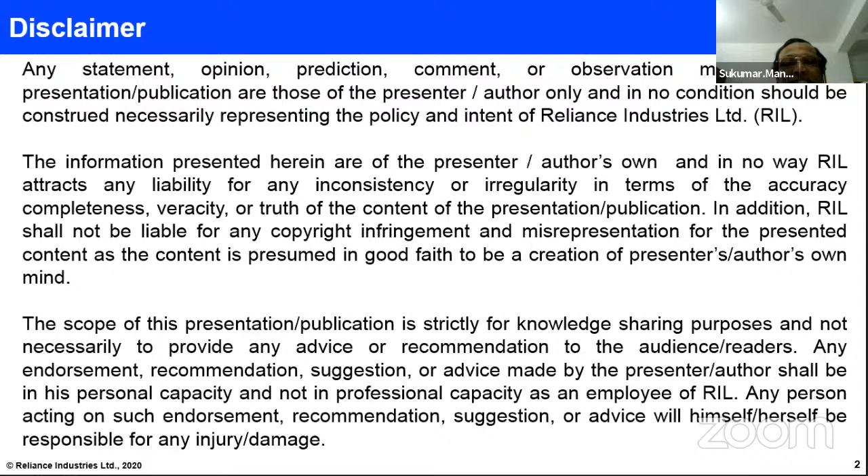This gives some glimpse of our company, Reliance Industries Limited. Reliance, as you know, is really a made in India, made for India, and made by Indians company. It has treated its investors, big or small, as value partners in building world-class assets that have made India proud. Its business is aligned with national goals and priorities for making India self-resilient, strong, and prosperous. The products and services of this company have created immense societal value by touching the lives of 800 million Indians, and potentially all 1.3 billion Indians. Now, at the beginning of a new and unprecedented wave of wealth creation for India by harnessing the power of new technologies to fire its driver's growth engine.

Reliance has three mega growth engines. The first is the new one, Jio, the digital life. Second is Reliance Retail, and the old business is Reliance Oil to Chemicals. In Jio, connecting India digitally with unprecedented reach at affordable prices with superior customer experience - as per the 2021 first quarter data, it's more or less 400 million subscribers in less than 4 years since inception. There's also a lot of growth in Reliance Retail, serving the entire spectrum of Indian society with 640 million footfalls in the financial year, supplying a diversified product portfolio of groceries, fashion, lifestyle, consumer electronics, connectivity through more than 11,000 stores across 28.7 million square feet of retail area.

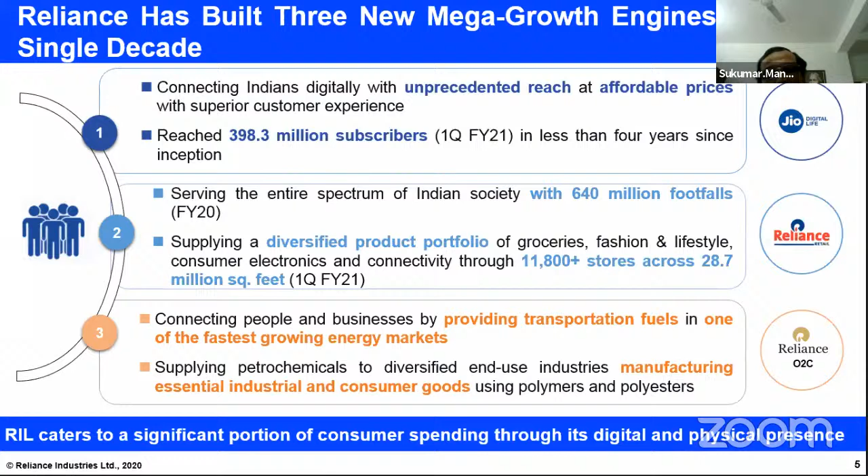Reliance Oil to Chemicals is connecting people and business by providing transportation fuels in one of the fastest growing energy markets, supplying petrochemicals to diversified end-use industries manufacturing essential industrial and consumer goods using polymer and polyester. So Reliance caters to a significant portion of consumer spending through its digital and physical presence.

Now I'm going to my presentation. I'll basically cover 5 topics: value creation from waste refinery streams, how to sustain plastic business without pollution, agro biomass to green hydrogen, waste to wealth - that is RIL RCAT HTL, and net zero CO2.

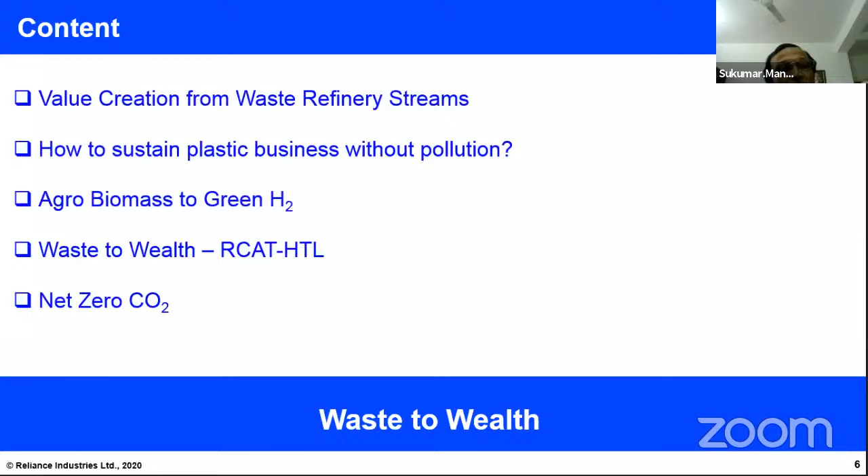So first I'll go with the DSO, that is disulfide oil or sulfur oil. Disulfide oil is a byproduct of the desulfurization process of LPG.

The LPG goes through a process called MEROX, which stands for mercaptan oxidation. The LPG contains lighter mercaptans from C1 to mostly C3, C4, which impart odor, induce corrosion, and cause environmental hazards.

In the MEROX unit, that mercaptan-laden LPG, containing methyl mercaptan, ethyl mercaptan, and so on, is treated with caustic solution in presence of a homogeneous catalyst.

So that reaction works like this: when we get the LPG, it mostly comes from FCC, that is fluid catalytic cracking, or from the coker, delayed coker unit. In addition, we have LPG source called saturated or straight-run LPG, which basically comes from CDU.

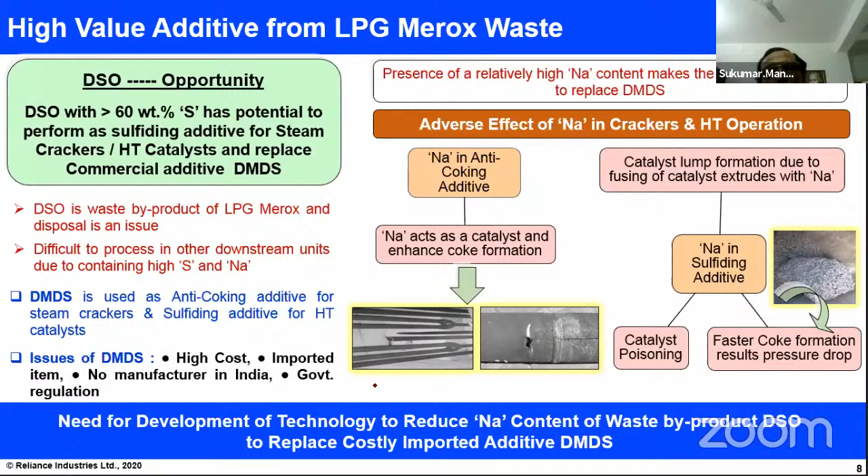So as such, although DSO has a lot of sulfur, I cannot use it as a sulfiding agent unless I have a suitable method to remove the sodium. With this background, it was our motivation to develop a process that can reduce the sodium lower than 1 ppm in the treated DSO.

This gives a little more explanation: when used in a cracker, it increases coke formation, and that leads to reduced heat transfer coefficient, so the furnace side's heat requirement or temperature requirement will be high. The deposited coke hampers heat transfer, increases coil pressure drops, and affects skin temperature of the external tubes. So that's the issue.

So basically the additive DMDS is decomposed at high temperature, and then we get the sulfur. That sulfur poisons the fresh metal on the furnace coils, mostly nickel and iron, passivating them, which is why it reduces coke formation. That's why this sulfur is used.

Again, in the hydrotreating catalyst, the catalyst, actually CoMo or NiMo, is all present in oxide form when you start using it. That oxide form is very less active, so to convert it to the more active sulfide form, sulfiding is required.

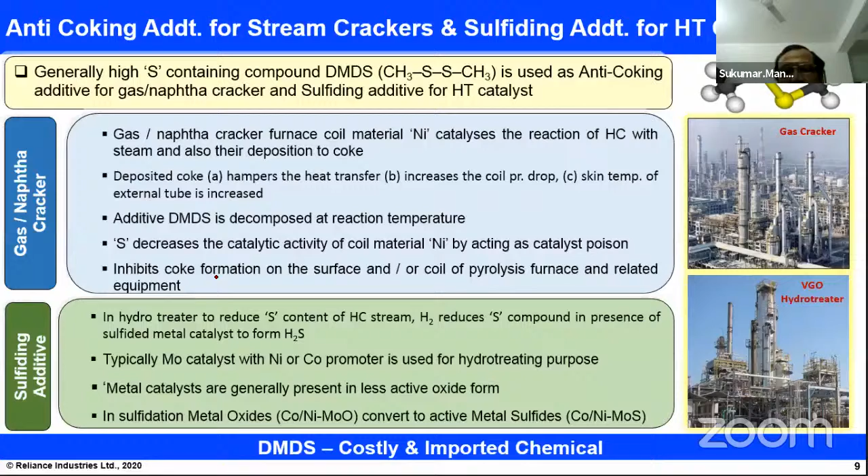So we basically developed a patented process wherein we develop an adsorbent based technology that makes sulfur oil high value, that DSO, by reducing sodium well below 1 ppm while maintaining stringent specs of water and sulfur.

We have patents granted in India, US, Europe, Gulf countries, and Nigeria. So we have the global patent and freedom to practice for this process. This is unique - nobody has developed an adsorbent to remove sodium like this. Our process has significantly low capex and opex, is very simple, highly efficient, and a green process.

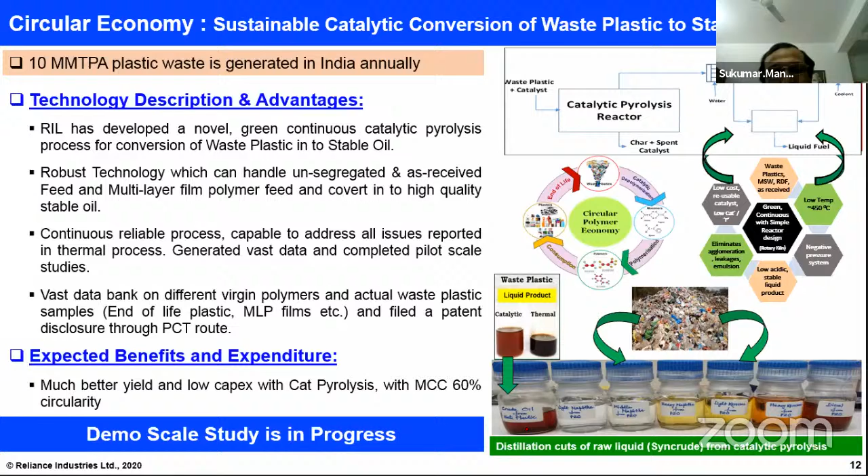In the liquid, you'll get mostly the gasoline cut. You'll get low light cycle oil, and the clarified oil is very less. LCO is minus 20, CSO is minus 10. And again, because of the catalytic effect, your reaction temperature is around 50 to 60 degrees lower.

So the novelty is that it is capable of processing as-received feedstock, MLP, and other different kinds of feedstocks. The novel design reduces vapor residence time and increases the liquid yield. Proprietary catalyst with very low catalyst to feed ratio, and the catalyst can be regenerated. The liquid product's API is 35, low sulfur.

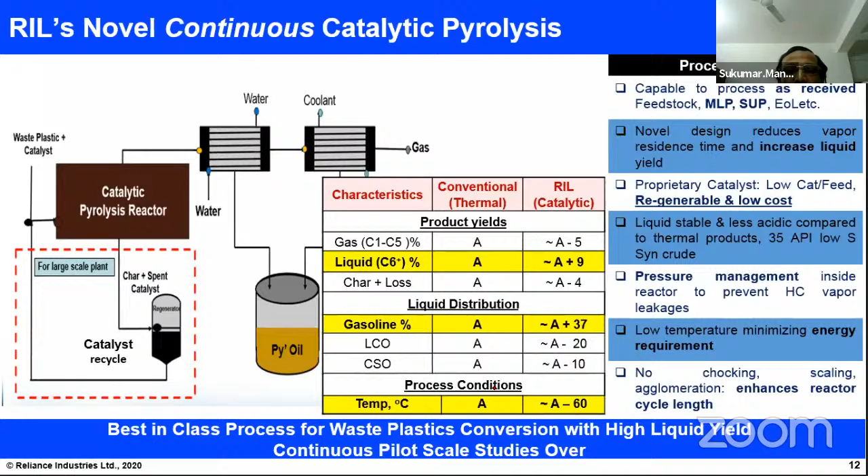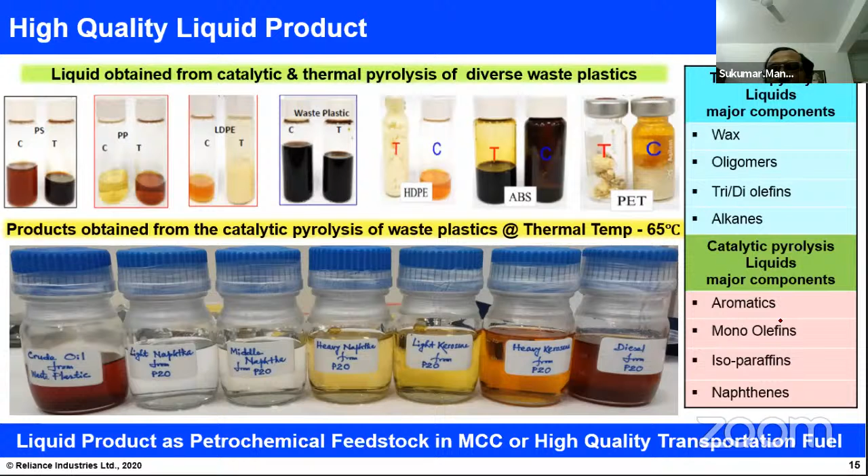In our case, its major components will be aromatics, monoolefins, isoparaffins, and naphthenes. So if we crack it in MCC, then from monoolefins we will be getting lighter olefins, and aromatics end up as BTX, benzene, toluene, xylene. So that was the waste plastic process.

Now this MCC is really our oil to chemical process. In the future, as you know, the prediction is that from 2030 onwards, our transportation fuel demand will be dropping drastically, because it will convert into electric vehicles and all. So what will industry do? Those who have a refinery need to operate the plant in such a way that instead of making transportation fuel, they make something else.

If you see the plots, I have not given details, but the growth of petrochemical feedstocks, basically for making plastics and chemicals, petrochemicals, is very, very high. So if I can operate the plant to make petrochemical feedstocks instead of transportation fuel, then I can sustain the operation, and the profit from petrochemicals even today is higher than making transportation fuel. So our whole oil to chemicals business has a lot of stakes on this process development.

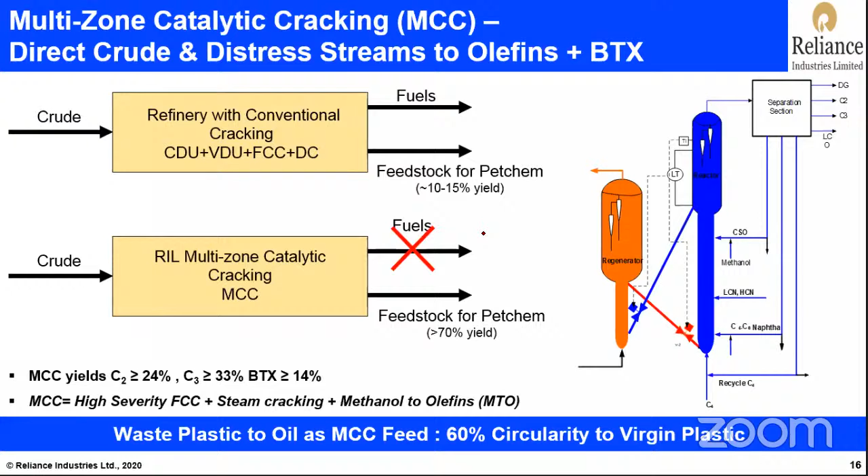Before talking about multi-zone catalytic cracking, I'll take 2-3 minutes to explain how FCC works. Some of you may be aware of it, but I'll give a few details so it will be easy to discuss MCC. In the FCC, the left side is called the regenerator, the bottom zone on the right side is called the riser, the top is called the reactor, and the bottom portion of the top zone is called the stripper.

The fluid bed catalyst, which is microspheres, comes from the regenerator, which operates at a temperature of 700. The regenerated catalyst comes through this line and ends at the bottom of the riser, and here the catalyst contacts the feed, and immediately the feed gets vaporized and starts cracking. As the temperature here is 700, the feed vaporizes in a very short time. Feed is injected through a nozzle.

It gives a mist kind of material, and it is vaporized. And after vaporization, the cracking starts in the vapor phase, and it is converted to the product as it goes on and on. The reaction starts, and at the end of the riser it goes to the cyclone. In the meantime, when the catalyst reaches the top, the catalyst is partly deactivated because of the coking, and the product and catalyst mixture gets separated in the separating device called cyclones.

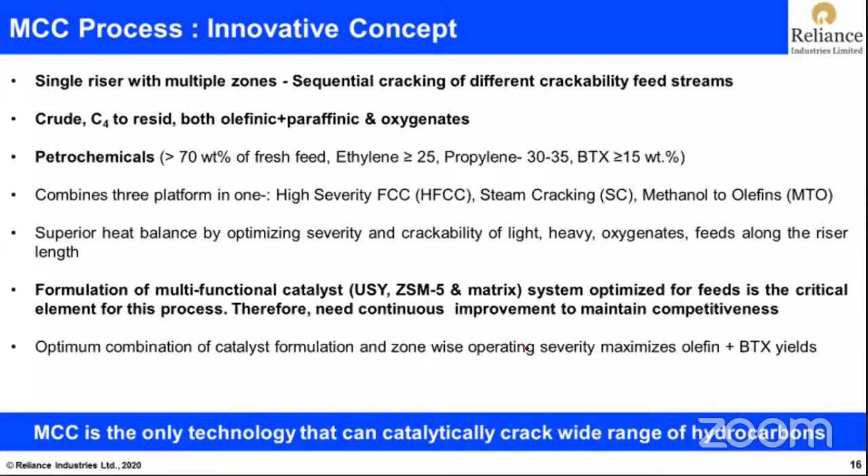So next is agro biomass to green hydrogen. Another very important development is catalytic gasification of agro biomass to green hydrogen. As you know, at Reliance we have the world's largest thermal gasifier for petcoke gasification. So we have developed a dual bed catalytic gasifier to convert any carbonaceous feedstock to syngas. Here I am specifically discussing agro residue. It can even be used for petcoke and others.

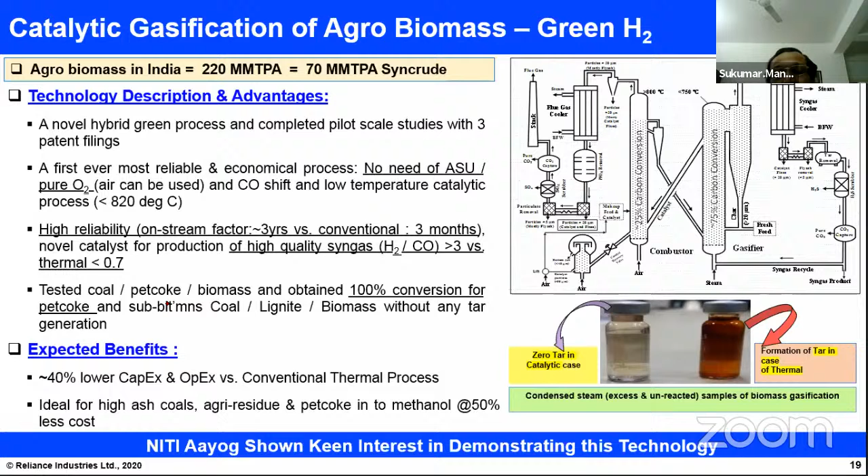This picture shows zero tar in the case of catalytic gasification, whereas the right side is thermal. As for the expected benefits, because of the high reliability and much less complicated hardware, the capex is estimated to be around 40% lower, and the opex also, compared to conventional thermal processes. It is an ideal process for high ash Indian coal, agri residue, and pet coke to methanol. This was also presented to Niti Aayog, and they have shown keen interest in demonstrating this technology.

So now the next topic is RCAT HTL, the Reliance catalytic hydrothermal liquefaction process. We basically started this process with algae to oil, and now it is proven in the pilot plant, a roughly 10 barrel per day pilot plant, for agro waste, food waste, MSW, organic feedstock, sludge, and industrial waste. This shows the schematic here.

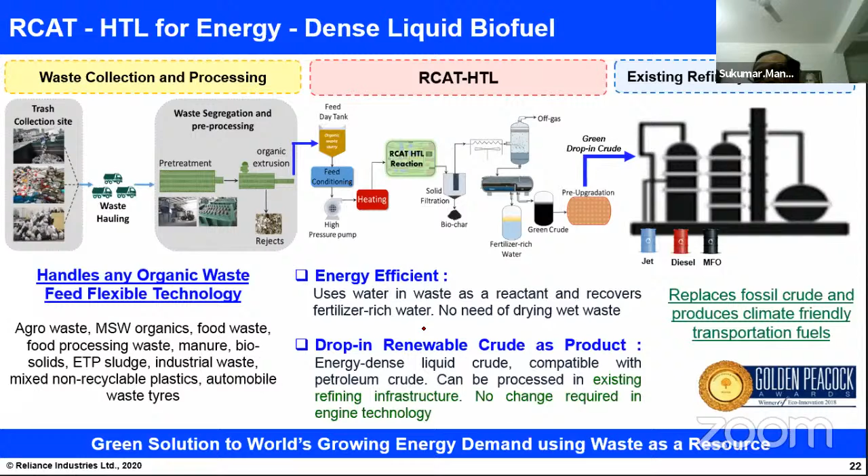So for this process we have 35 plus patents, and presently we have demonstrated at pilot scale a 10 barrel total feed capacity, and we are planning to develop a 50 barrels per day capacity demo plant, and we are trying to see how quickly it can be commercialized, the process.

So that gives the concept to commissioning experience as an end-to-end solution for any entrepreneurs, which can even be licensed. We tested varieties of feedstocks, but the feedstocks having huge contents of moisture will be best suited, because you will be saving money or energy for drying the feedstock. So wet feedstocks will be easily converted in this process.

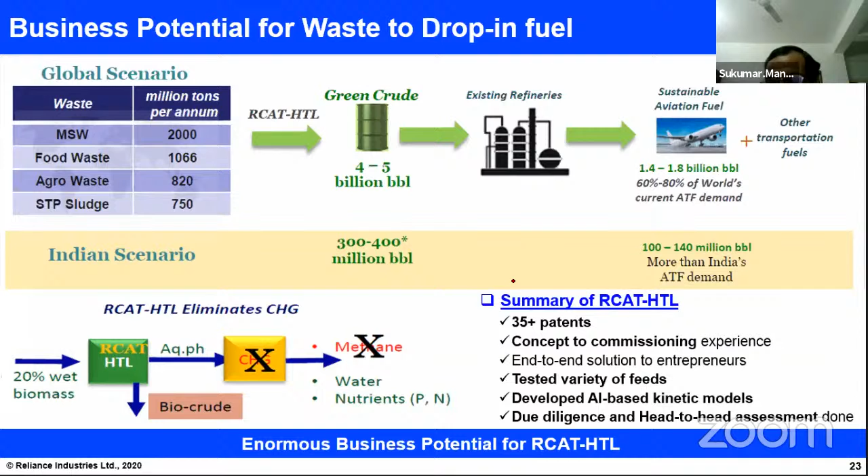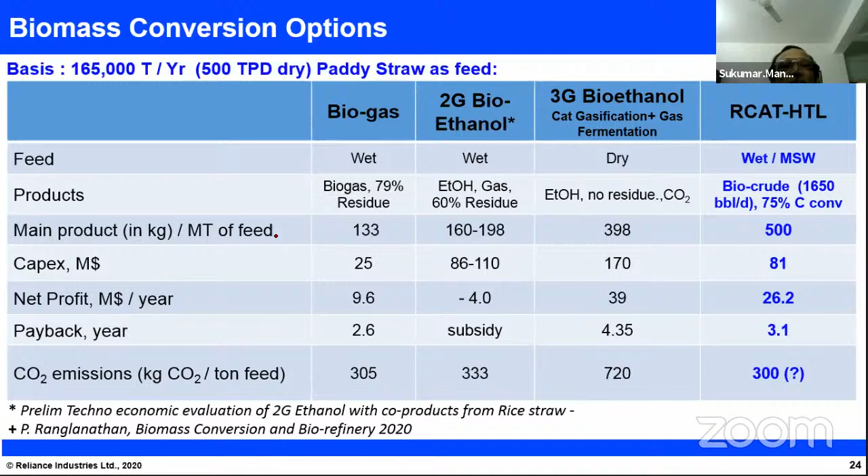And the CO2 emissions, kg CO2 emission per ton of feed processed, is also very low. So that gives a comparison for 500 ton per day dry basis paddy straw as a feedstock. Our company has already declared that by 2030, our process will be net zero CO2.

We are developing dimethyl carbonate, DMC, or it can be used in concrete curing, or basalt rock mineralization, underground sequestration. So these are all getting evaluated, and the economics are being analyzed to implement this process.

Then there are several options like algae to oil. We have a very big program on that - basically CO2 capture to biofuels and renewable CO2 plus renewable power to fuel, waste plastic to oil, bioethanol, used tire to oil, waste cooking oil to oil, biomass to ethanol and green hydrogen.

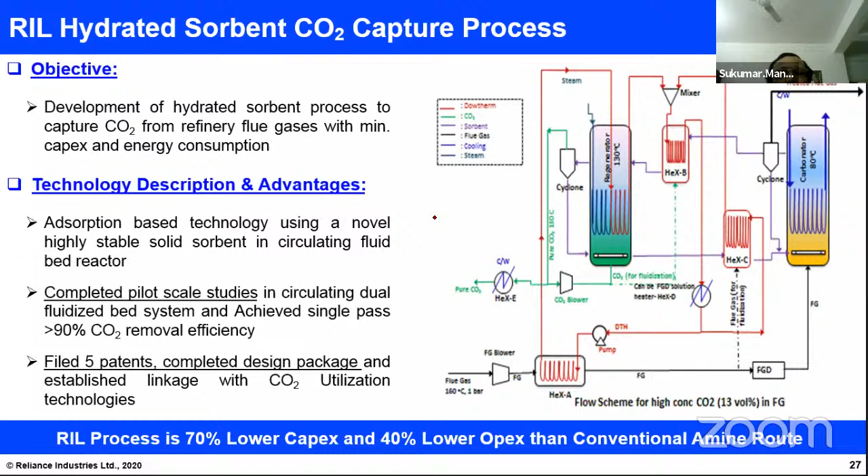With that, I cover all of my presentation. Thank you very much for listening. And if you have any questions or queries, please let me know.

Thank you, Sukumar, for such innovative ideas. The ideas have been translated to technology for the development of our country, what the Prime Minister calls Atmanirbhar Bharat. We are very grateful, because initially it is planned - I mean, the chemical engineers' concept of doing such fuel things from pyrolysis and such. But that is very old technology, and these are all modern technologies. I was in a meeting, but I simply switched on the YouTube channel where I could view your whole presentation. So many avenues you have discussed - really, this is wonderful. I don't know whether our young budding engineers could get this opportunity to translate ideas into action like what you people are doing. So we are very grateful to you.

Our next speaker, Dr. Sourja Ghosh, has already joined. I could speak a lot of things about you because we have a long years' association with this Reliance group, Dr. Arshit Das and others. But let me not speak all such things now and discuss, because our next speaker has joined.

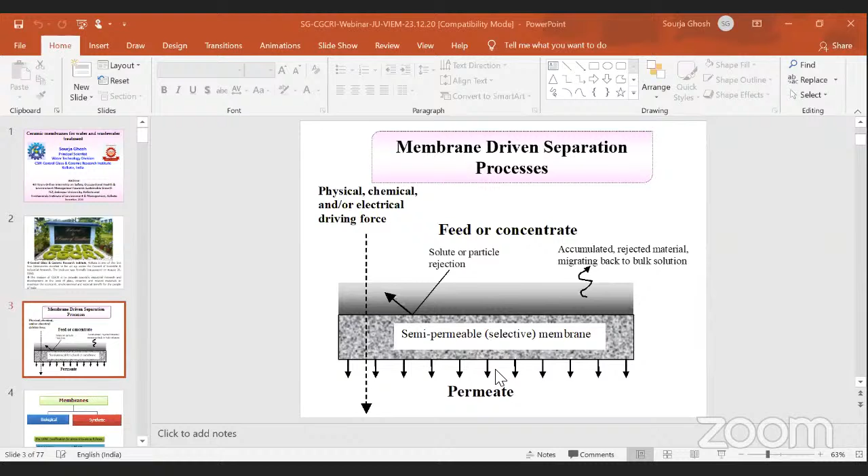So today's topic is on ceramic membranes for water and wastewater treatment. I'll give you a brief idea of membrane-driven separation processes. So what is a membrane? It acts as a selective barrier, and we place a feed to pass through the membrane. It has selective pore sizes, that is the semi-permeable membrane. Based on the pore size, or other driving forces, separation takes place, and accordingly the feed gets concentrated, and we produce the permeate or the treated water.

Now, the classification of membrane processes based on driving forces: microfiltration is a pressure-driven membrane process, and the operating pressure is generally low, that is 10 to 40 psi, whereas ultrafiltration is a bit higher, with pressure of 10 to 100 psi, where it separates biological colloids and macromolecules, covering a wide range of separation. Then comes nanofiltration, which requires around 100 to 500 psi, and the pore size of such membranes is less than 2 nanometers. So we use this for separation of dissolved contaminants and organic molecules.

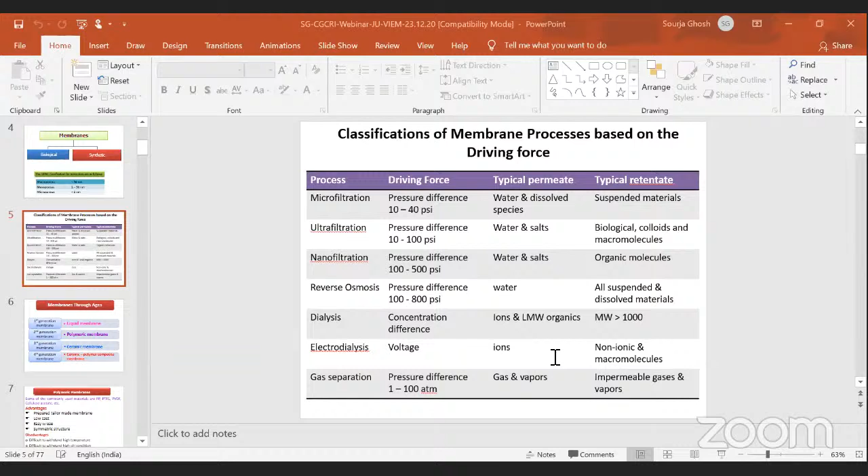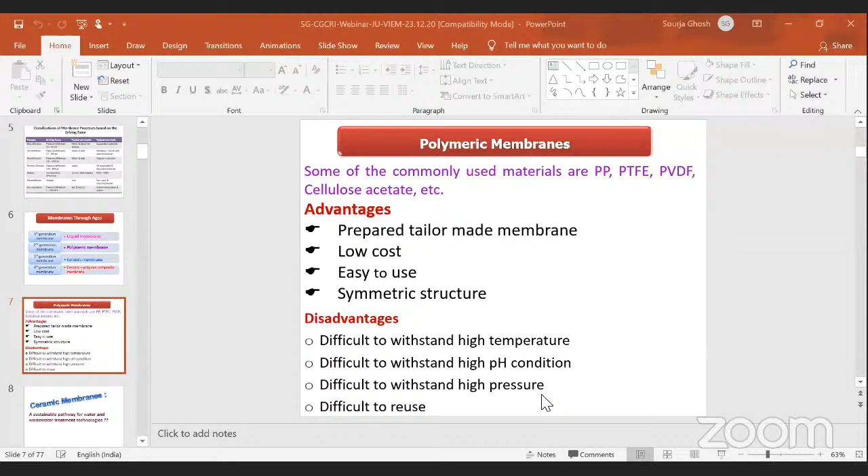For polymeric membranes, the commonly used polymer materials are PP, polytetrafluoroethylene, polyvinylidene difluoride, cellulose acetate, etc. The advantages of these membranes are they are easy to prepare, can be given tailor-made pore sizes, are low cost, and provide symmetric structure. However, such membranes carry some disadvantages also, that is low stability in chemical and mechanical environments. These membranes are also prone to attack under harsh chemical conditions, cannot withstand high temperature, and it is difficult to reuse such membranes, so they have a shorter life compared to inorganic counterparts.

So ceramic membranes come into the picture here, providing a pathway of sustainable nature for water and wastewater treatment technologies.

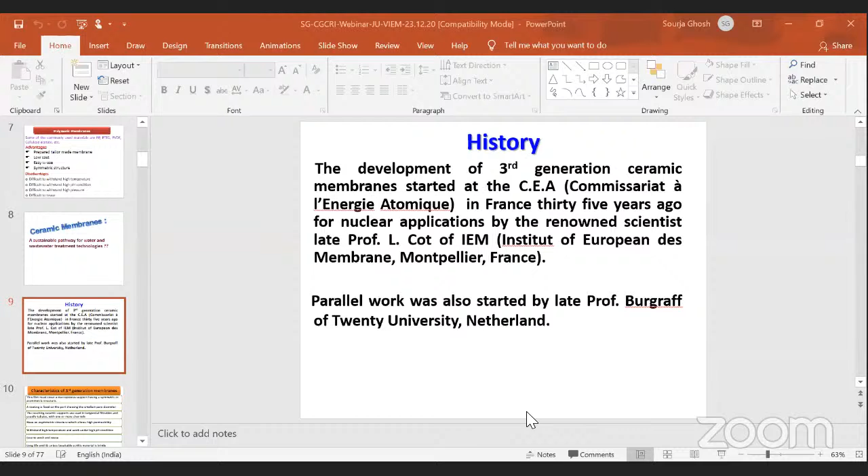So if we go to the history of ceramic membrane, the development of this third generation ceramic membrane was in France 35 years ago. Since then, various countries are engaged in ceramic membrane research, among them France, Germany and the Netherlands. In India, CSIR CGCRI is one of the pioneer labs which prepares indigenous ceramic membranes for various selective applications.

The characteristic of these ceramic membranes is that there is a thin film which covers a macroporous support. The basic nature of the membrane is symmetric or asymmetric. However, mostly it is an asymmetric structure, wherein the coating is given to produce the smaller pore diameter. The membranes are available mainly in tubular configuration, but now also in capillary as well as hollow fiber configurations, and they allow tangential filtration. The membranes provide high permeability, and most significantly they have the resistance to withstand high temperature and work under high pH conditions.

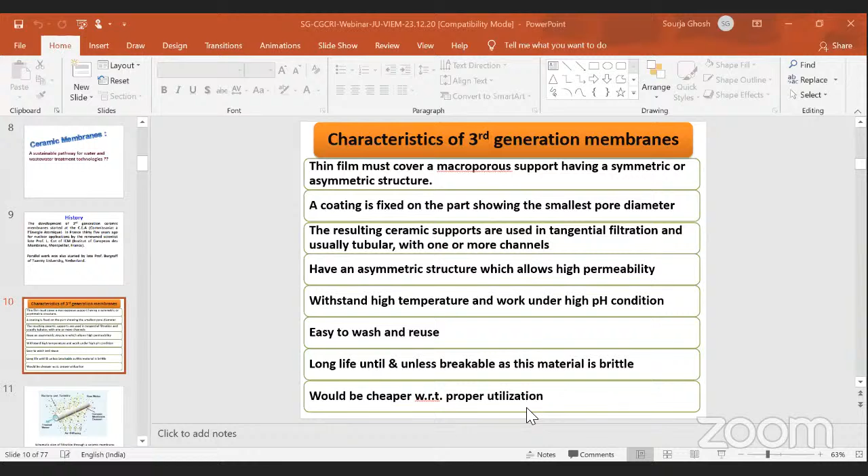Such membranes are easy to wash and can be thoroughly cleaned for reuse. They have a long life compared to their polymeric counterparts, but the problem is they are brittle. Otherwise, these membranes show greater longevity during industrial operations. These membranes can be cheaper if properly utilized. That is, the initial cost of such membranes is high. However, if they are used properly, they will give a longer life and the operating cost will be lower.

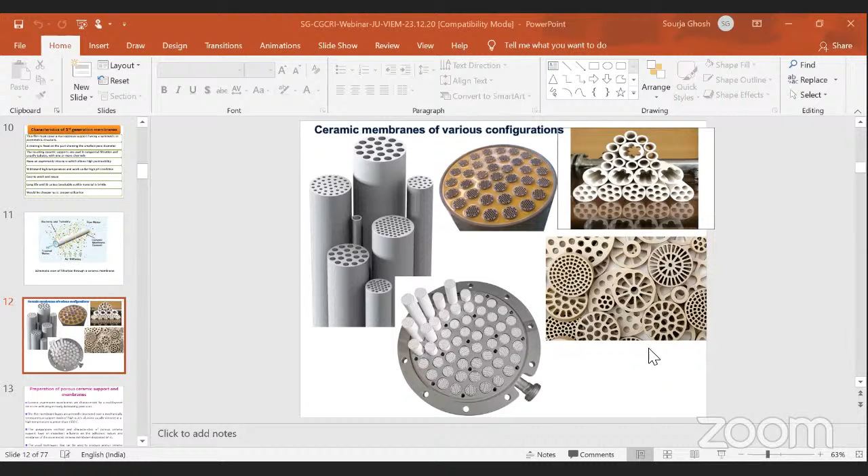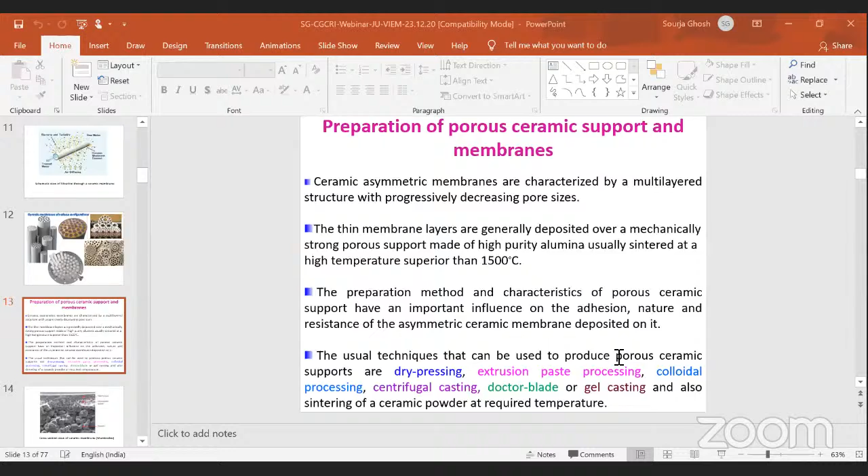The preparation of porous ceramic supports and membranes is carried out in CGCRI. These asymmetric membranes are characterized by a multi-layered structure with progressively decreasing pore sizes. The thin membrane layers are generally deposited over a mechanically strong porous support, generally made of alumina or a clay and alumina mixture fired at high temperature, greater than 1500 degrees centigrade. Over the porous support, a selective layer is given for separation of smaller particles. The usual techniques for preparing this support are dry pressing, extrusion, paste processing, colloidal processing, centrifugal casting, doctor blade or gel casting, etc.

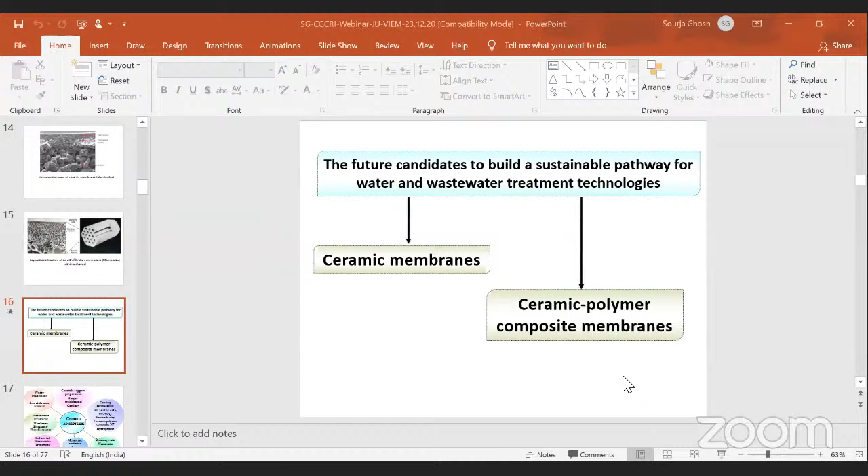So the future candidates to build a sustainable pathway for water and wastewater treatment technologies are ceramic membranes and their counterpart, the ceramic polymer composite membrane, for a wide variety of water and wastewater treatment applications. Now in CGCRI, the ceramic membrane is the heart of the water technology division, and there are different areas. One is support preparation, done in single and multi-channel capillary configuration. Then we apply coatings on such membranes, that is microfiltration, ultrafiltration and nanofiltration coatings.

We produce hydrophobic ceramic membranes. All these are made from alumina, zirconia, titania. The applications involve drinking water, wastewater, brackish water, and grey water treatment. Then we develop a membrane contactor process for CO2 capture using reactive absorbents. Drinking water treatment using ceramic membrane for iron and arsenic removal. Then we apply wastewater treatment using membrane bioreactor technology and membrane photobioreactor processes. Also, we work on various types of industrial wastewater treatment, that is textile, tannery, pharmaceutical, electroplating, and many others.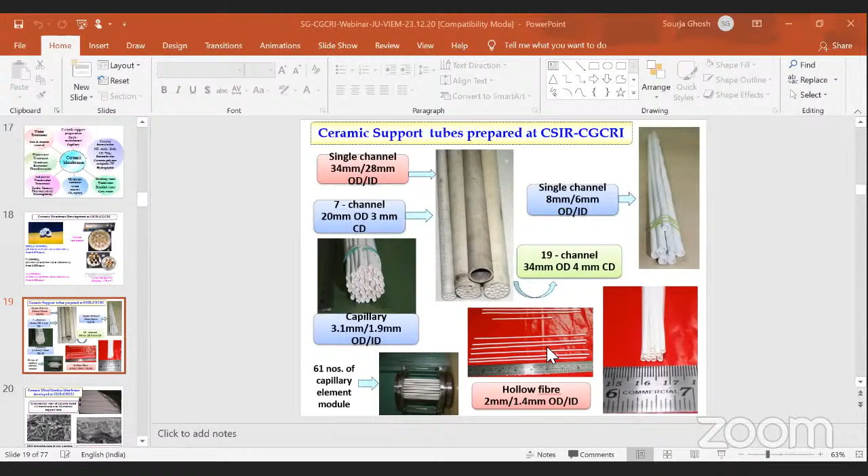These are various types of membranes prepared in different configurations. The diameter of the supports is reduced to obtain high surface area for selective applications, that is called capillary membrane. And these are the very thin hollow fiber membranes, that is 2 mm by 1.4 mm OD/ID.

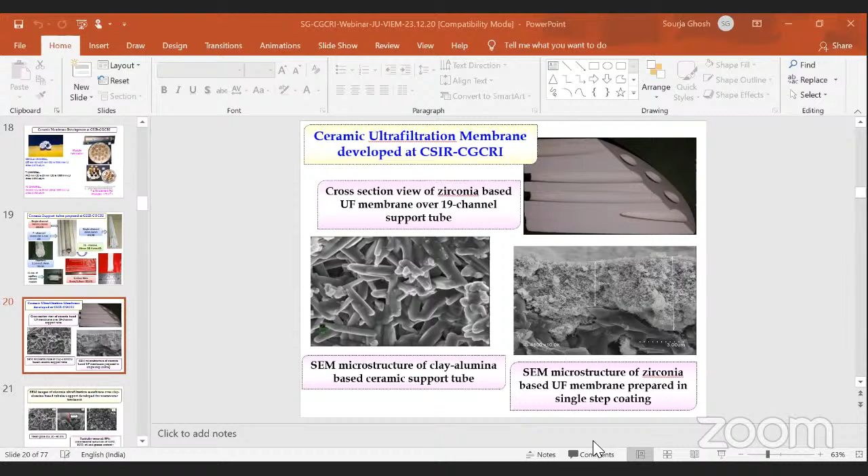This is the microstructure of the ceramic ultrafiltration membrane based on zirconia. This is prepared on a 19 channel support tube, and this shows the microstructure of the membranes, and a uniform coating is developed on the porous support.

This is again another microfiltration ultrafiltration membrane, zirconia over clay and alumina support tube. This membrane showed a pore size of 30 to 40 nanometer, and when applied for treatment of wastewater, it resulted in turbidity removal of 99%. Then considerable reduction of COD, BOD, oil and grease was achieved with complete removal of total suspended solids and MPN, that is the most probable number representing the microorganism concentration in the water.

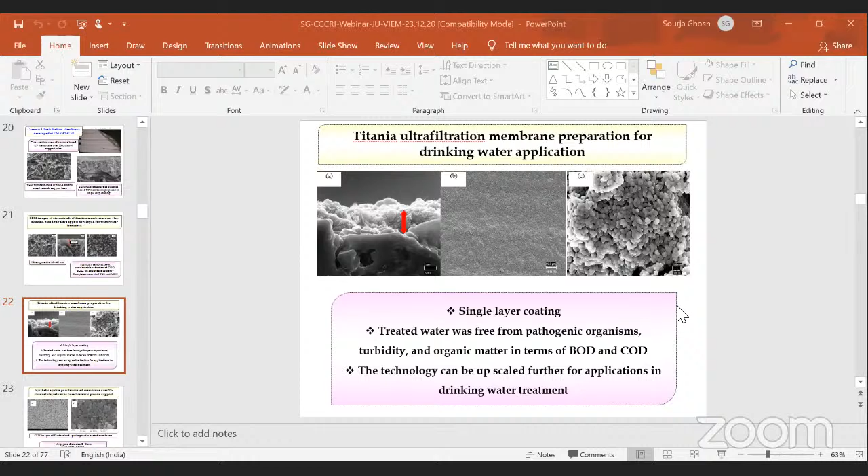This is the titania ultrafiltration membrane prepared for very specific drinking water application. And this is a single layer coating. The membrane is able to make the water completely free from pathogenic organisms, turbidity, organic matter, and BOD/COD. So there is a study going on to scale up this technology for drinking water treatment in very contaminated locations.

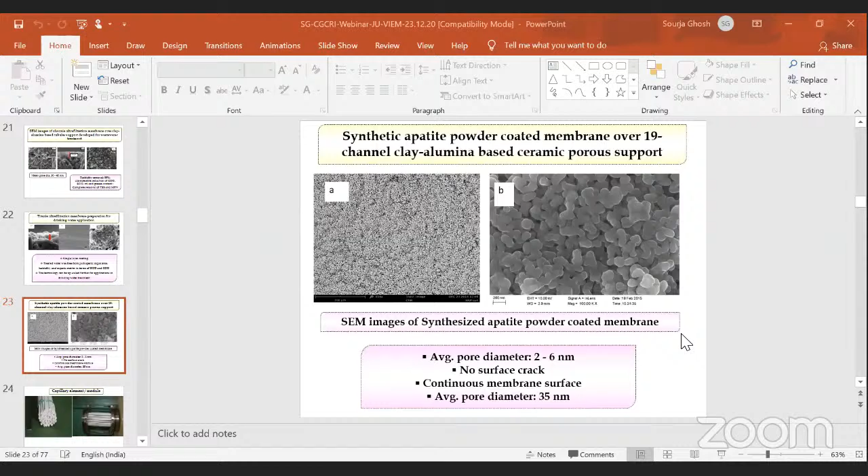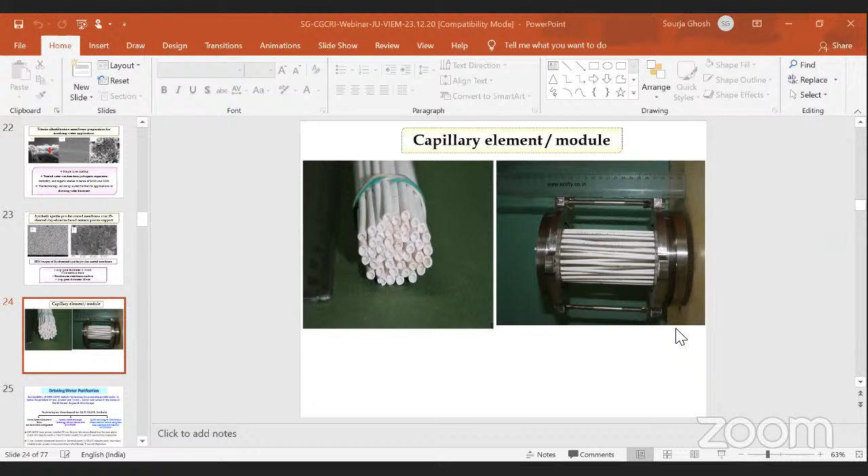This is the capillary membrane element module. This is used for carbon dioxide capture, that is gas liquid contacting operations, wherein a large surface area is required and separation occurs across the surface of the membrane.

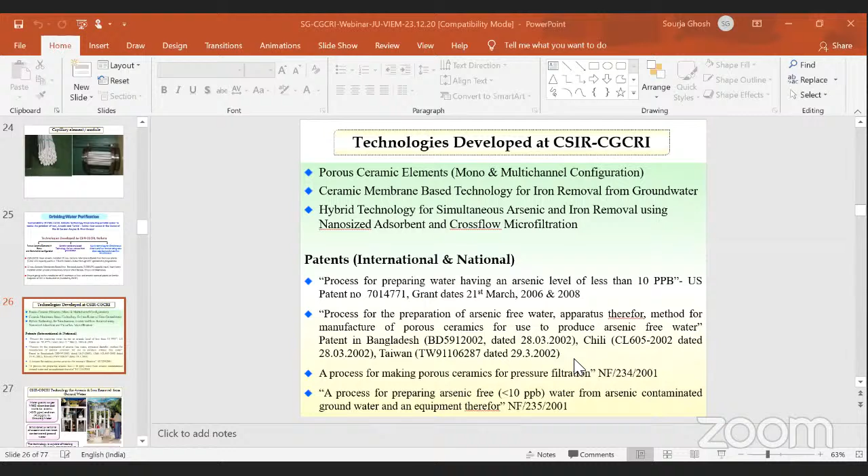Technologies developed at CGCRI. The porous ceramic element preparation technology is developed in mono and multi-channel configuration. Ceramic membrane-based technology for iron removal from groundwater, and hybrid technology for simultaneous arsenic and iron removal using nano-sized adsorbent and cross-flow microfiltration. There have been a number of patents applied, international and national, and the patents are granted.

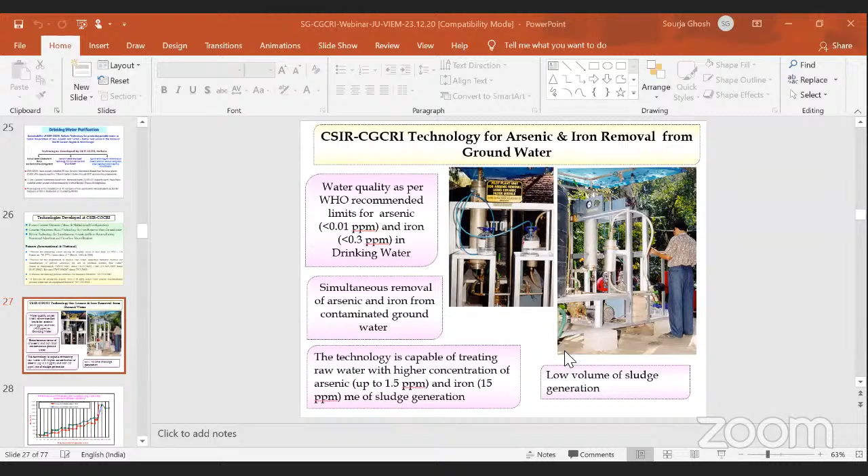This shows the community plant installed for contaminated arsenic and iron containing groundwater treatment. Water quality as per the WHO recommended limit for arsenic was achieved, and also for iron. The technology operates for simultaneous removal of both arsenic and iron, and there is low volume of sludge generation.

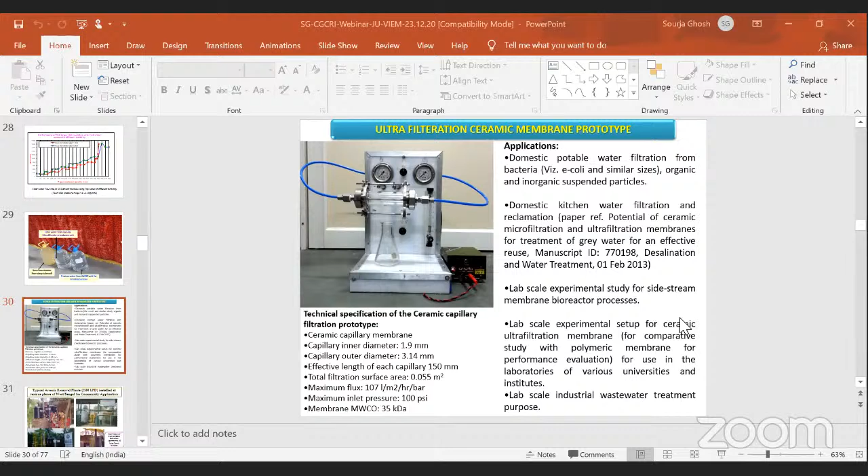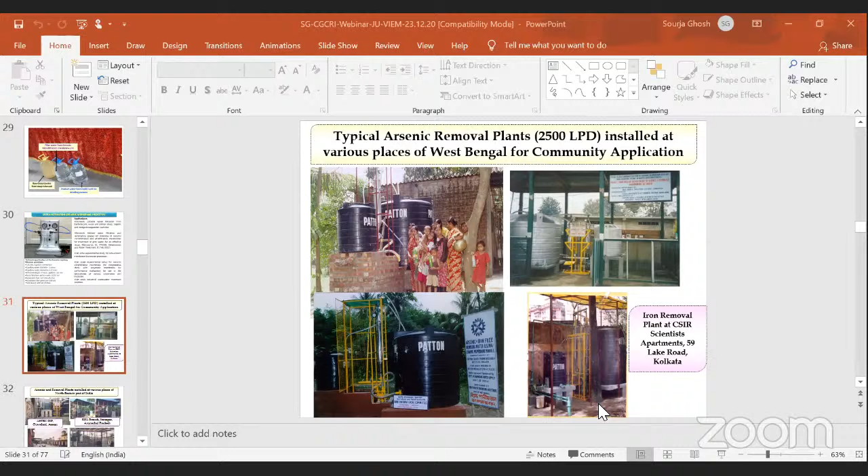This is suitable for domestic water purification as well as lab scale experimental studies in membrane bioreactor process, and also ceramic UF process in various types of wastewater treatment. This is the typical arsenic removal plant installed at various places of West Bengal for community applications. This is the iron removal plant installed at our CSIR housing complex.

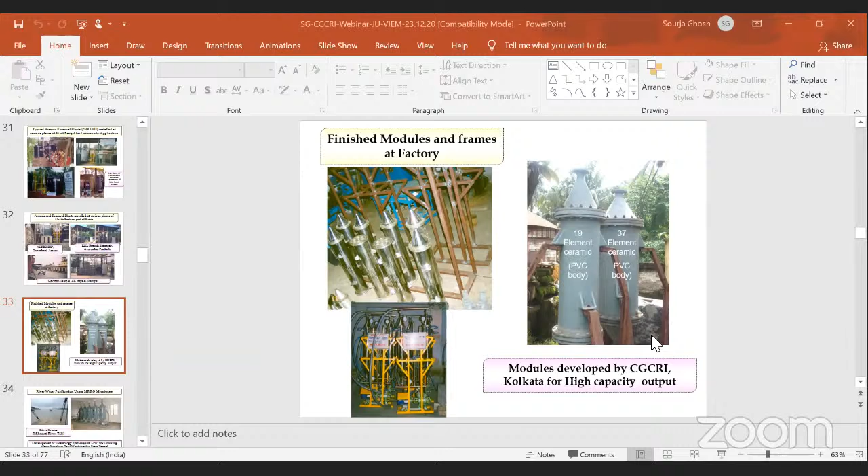And these are the various pictures of various plants at northeastern locations of the country. So this is the finished module and frames at factory, and this is the PVC module. This is the low cost module prepared to reduce the initial cost of the membrane process. So this technology has been commercialized.

This is the river water purification unit. So it works on a combination process of microfiltration and reverse osmosis. So initial pretreatment is done by MF process. So the river water source is the water from Ichhamati river at Taki, and the capacity of such membrane plant is 8,000 LPD.

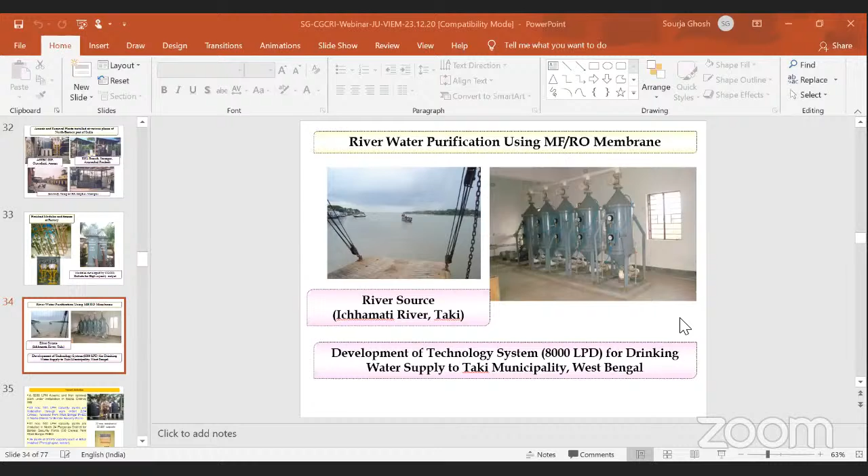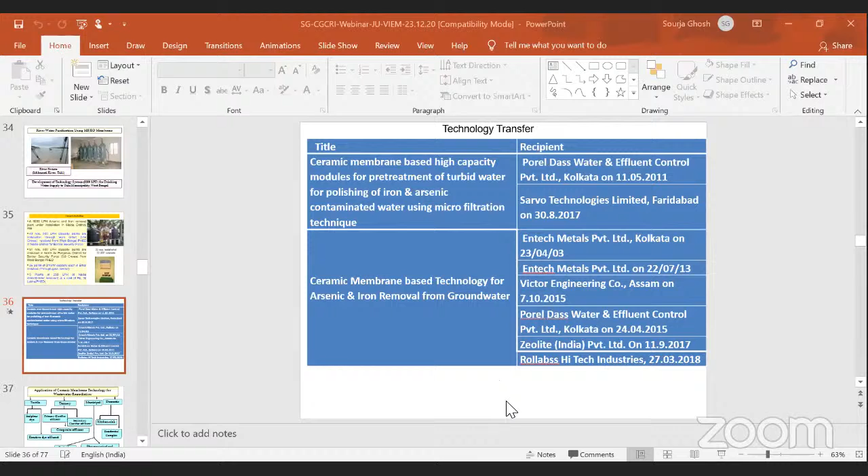So the recent activity involves the 8,000 LPD arsenic and iron removal plant in the district of Malda, and then providing the required plants at the border security forces at Nadia. So these are the technology transfers that have been done. So several licensees are there in CGCRI who have taken the CGCRI technology for this arsenic and iron removal from groundwater.

Now coming to the wastewater. So the ceramic membrane technology is also used for wastewater treatment, and various types of wastewater are used, that is the textile, tannery, municipal and domestic. Among the textile effluent there are classifications. So one is the sulfur dye containing toxic water, another is the reactive dye containing effluents. Then in tannery also we go for primary clarifier effluent, secondary as well as the composite effluent.

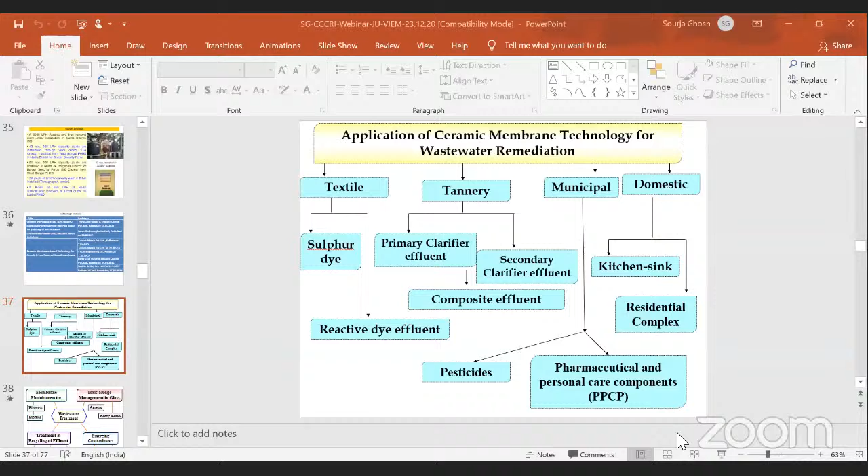Coming to the municipal wastewater, it contains various types of emerging contaminants like pesticides and pharmaceutical and personal care products, denoted as PPCP. Domestic wastewater involves the water in the kitchen sink, that is the highly oil rich and organic rich wastewater, and the wastewater collected from the residential complex.

So this is the schematic of a textile wastewater treatment process using ceramic membranes. This is a combined process wherein the ceramic microfiltration membrane is used with a waste-derived biosorbent for treatment of textile dye house effluent. There are so many small scale textile industries located in and outskirts of Kolkata. They are using various types of reactive dyes as well as sulfur dyes for dyeing the clothes.

So we collected the effluent from such industries and applied the combined process, that is the biochar was derived from sugarcane bagasse, and it was combined in the ceramic microfiltration process. This is the membrane microstructure before use and after use. And the treatment process resulted in 91% COD removal, 93% total organic carbon removal, and 99% removal of dyes, suspended solids, as well as heavy metals.

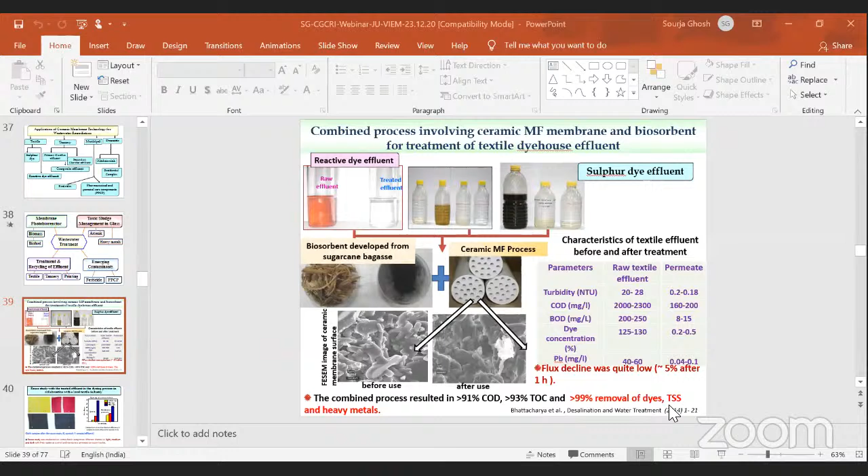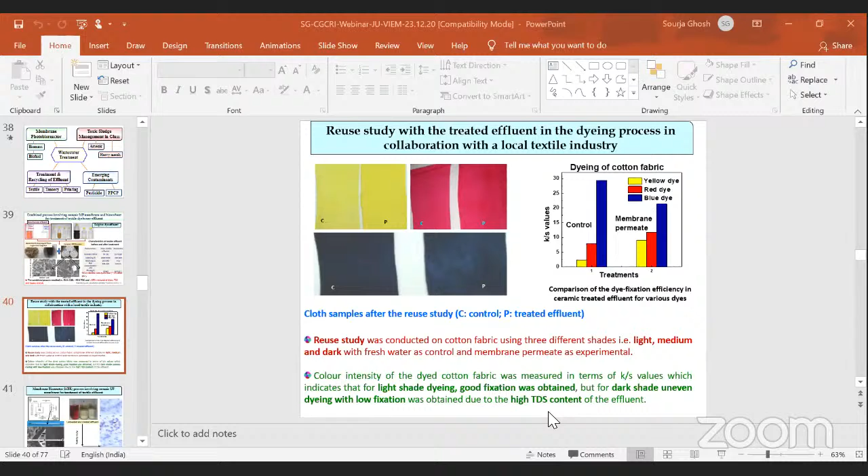And you can see that light, medium and dark shade dyeing was used with fresh water as control and membrane permeate as experimental. The color intensity of the dyed cotton fabric was measured in terms of K/S values, which showed that the process was effective for the light shade dyeing, wherein good fixation was obtained with the membrane treated water. But as we go for the dark shade dyeing, low fixation was observed due to the high TDS content of the effluent.

This is another case study wherein the ceramic membrane-based MBR process was applied on cosmetic effluent.

That is, the wastewater was collected from a spa, and it was analyzed. So, three major contaminants were located: one is the dye, another is surfactant, another is triclosan. So we observed the removal efficiency using our MBR process, membrane bioreactor process. This is the ultrafiltration membrane used for the study. And we found that the treated water was free from color, triclosan, as well as surfactant content.

And the cytogenotoxic potential of the effluent was studied on a living system, that is this fish, wherein the oxidative stress and detoxification aspects are studied using various characterizations like enzyme assay and comet assay. So it showed that the effluent was free from this toxic effect, and it can be safely discharged into the environment or can be reused for various other applications like gardening, car washing, floor washing, and several other usages.

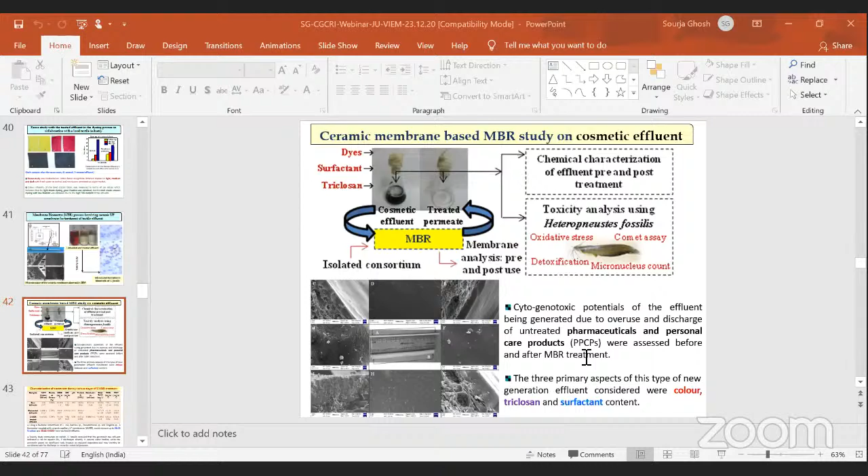This is the characterization of the wastewater before and after UMBR treatment, that is ultrafiltration induced membrane bioreactor treatment. And this process was found effective for a combination of bacteria like E. coli, Bacillus species, Pseudomonas species, and Shigella species. So when applied, this consortium of bacteria worked best, and coupled with the ceramic ultrafiltration membrane process, about 98.6% removal of color and 98.66% removal of COD was achieved from the raw textile effluent. And also the effluent was free from toxic impact.

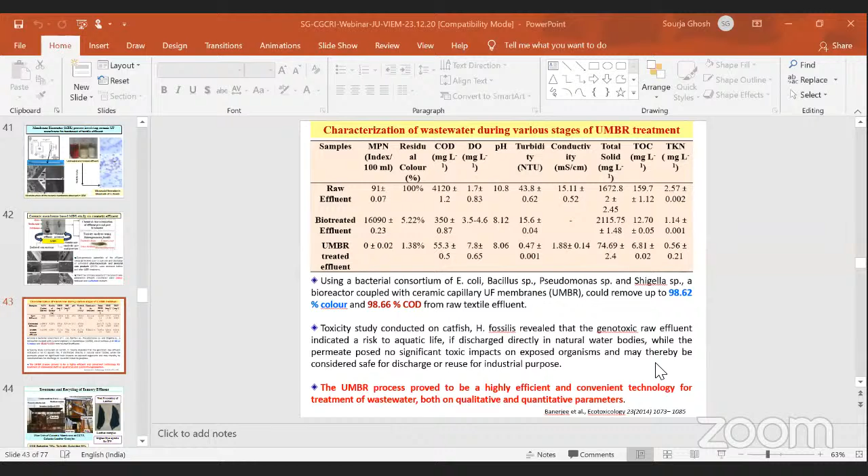So the UMBR process proved to be a highly efficient and convenient technology for treatment of wastewater, both on quantitative and qualitative parameters. And the UMBR process is a green process which does not produce any toxic sludge in comparison with the chemical driven treatment processes.

Another part of our work is the tannery effluent treatment. You all know that tannery effluent contains a significant number of inorganic and organic toxic contaminants. The wastewater production is also high in our country. So we applied the ceramic membrane technology for treatment and recycling of such wastewater. This is the membrane-based prototype installed at the premises of Bantala Leather Complex, wherein the dual membrane module works to produce the treated water, wherein the feed water is the water coming from the secondary clarifier, and the water was further treated for reduction of the organic content and partial dissolved content reduction. And this water was studied for reusability in the wet processing of leather.

This study was done in collaboration with CSIR Central Leather Research Institute (CLRI), wherein both the treated water and fresh water were used. The fresh water system was used as a control. The process enabled COD reduction of 82% and turbidity reduction of 98%, and higher dye uptake was obtained for the treated water sample. So this is the leather piece dyed with the experimental, that is the membrane treated water, and this is the control fresh water sample. Significantly higher dye uptake was obtained in this leather sample. So it shows the emerging potential of ceramic membrane technology for recycling large amounts of tannery effluent in the leather dyeing process itself.

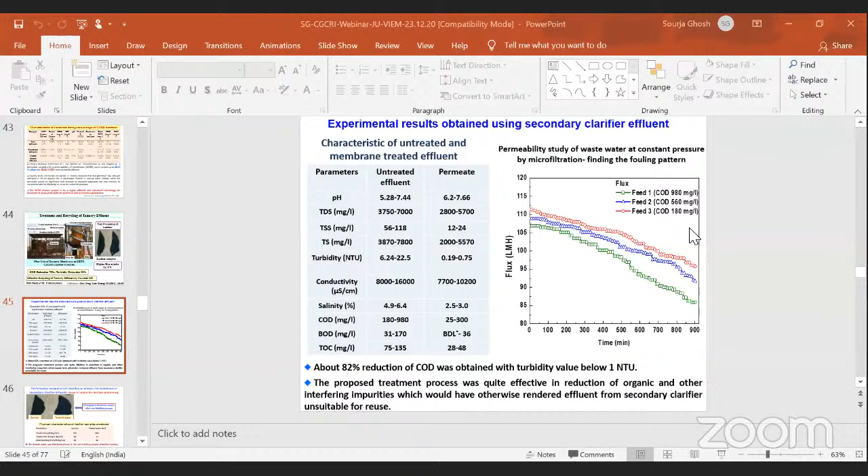So this is another sample of control and treated water for the leather sample, where these samples were analyzed for physical characteristics. You can see comparable performance is obtained for the treated water sample in terms of tensile strength, tongue tear strength, and grain bursting strength. So all these parameters are comparable. This sample shows comparable mechanical strength, and also the dye uptake was found good. So this can be used effectively in the wet finishing process of leather tanning.

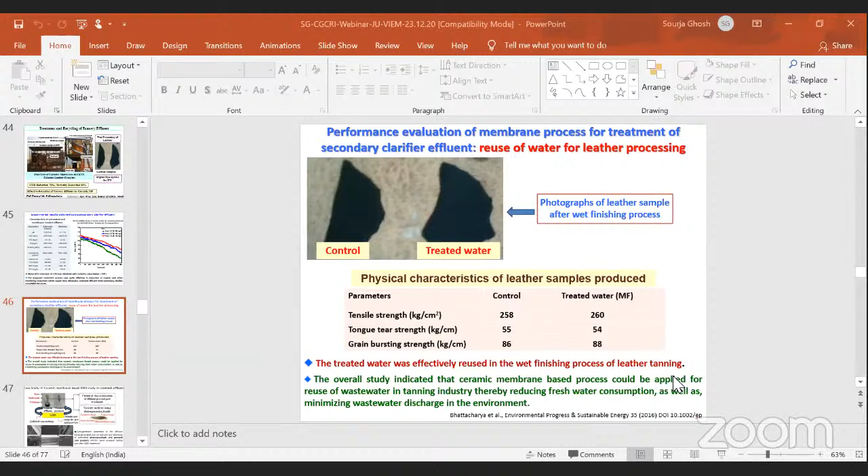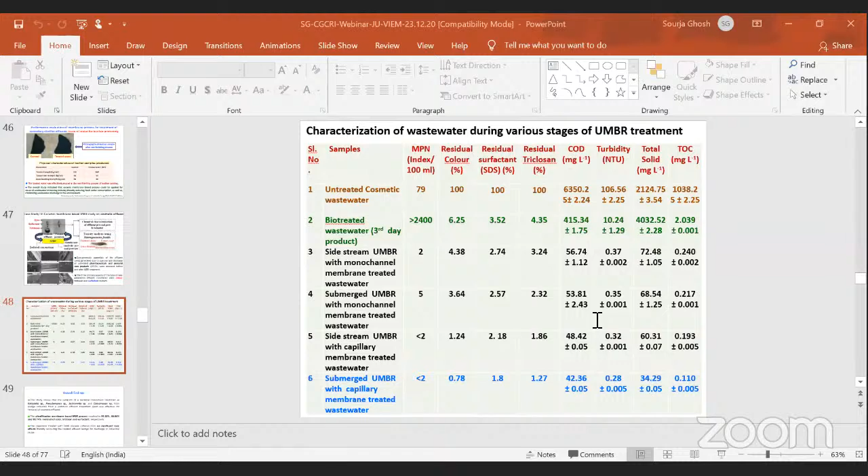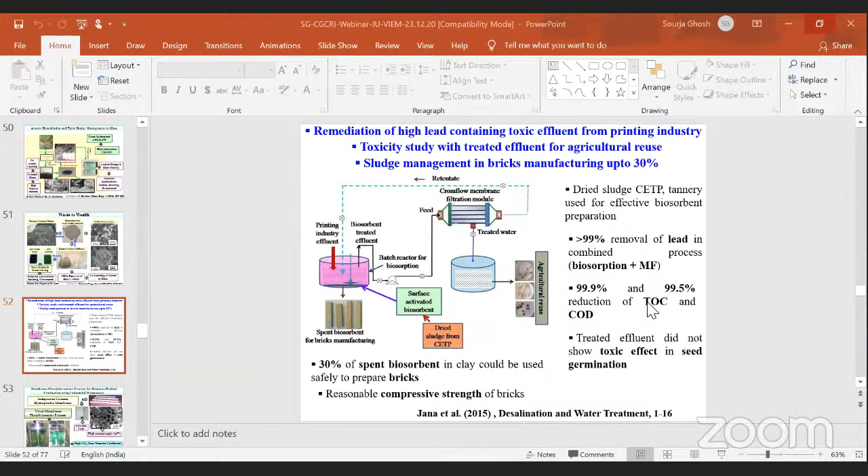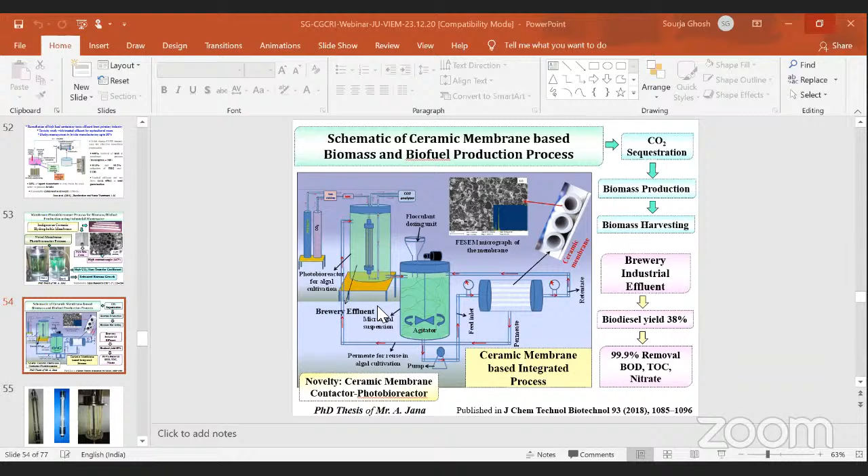And we have used brewery industrial effluent in this biomass cultivation process. It resulted in high lipid containing biomass production, giving a biodiesel yield of 38%. Our aim is to further increase this biodiesel yield, and 99.9% removal of BOD, TOC and nitrate was achieved in the process of bio-CO2 sequestration and biomass production.

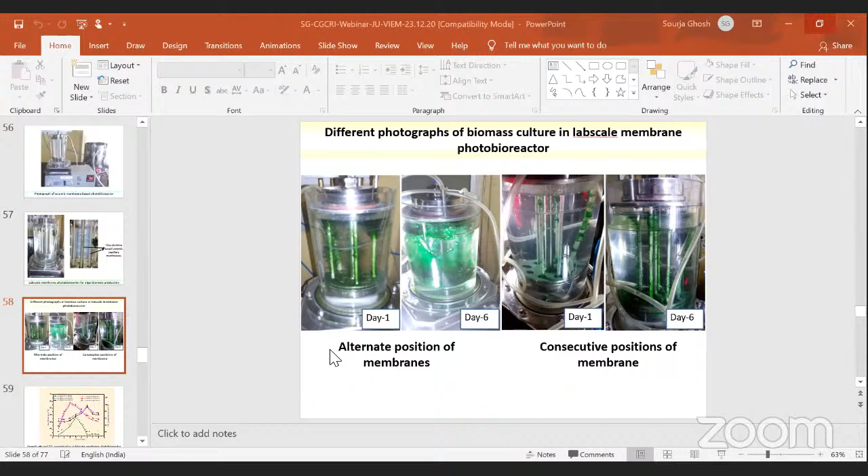These membrane modules are arranged in various configurations to study their effect on mass transfer: this is the alternate position, and this is the consecutive position of membranes.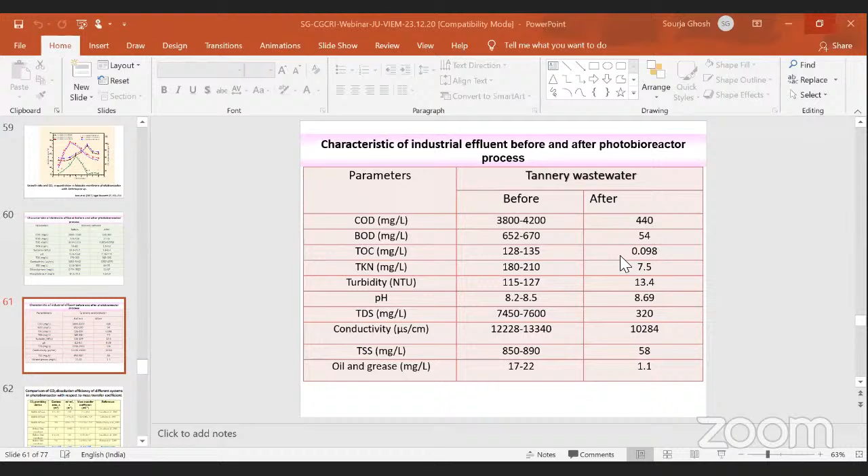This is industrial tannery effluent used in the photobioreactor process, and the algal biomass managed to survive under harsh operating conditions, resulting in considerable reduction of the parameters.

Comparing our membrane's efficiency in terms of CO2 dissolution in the photobioreactor, we found we are in a very encouraging position. This hydrophobic capillary ceramic membrane resulted in a high mass transfer coefficient, competitive with hollow fiber membrane systems on the higher side, and just below bubble diffuser rates. Our objective is to achieve even higher mass transfer rates, and we are working on this area.

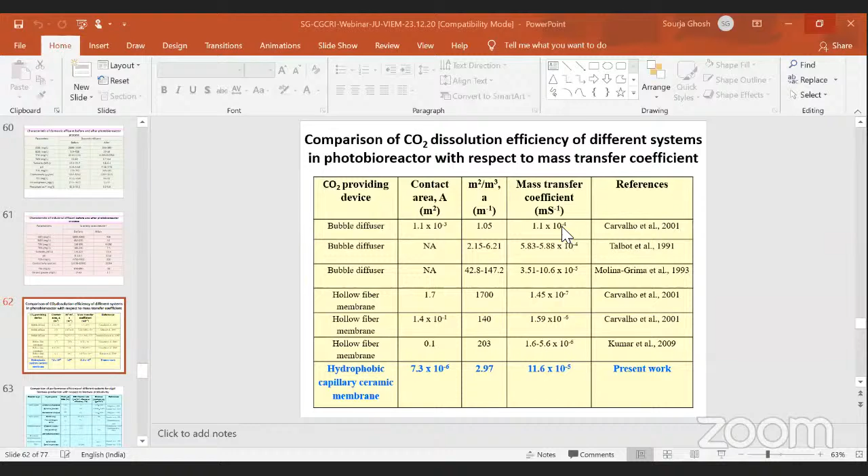This is a broad view of the membrane-based photobioreactor. These are the membrane modules used for CO2 dispersion in the algal culture media. Wastewater is collected and then fed into the photobioreactor at a controlled flow rate.

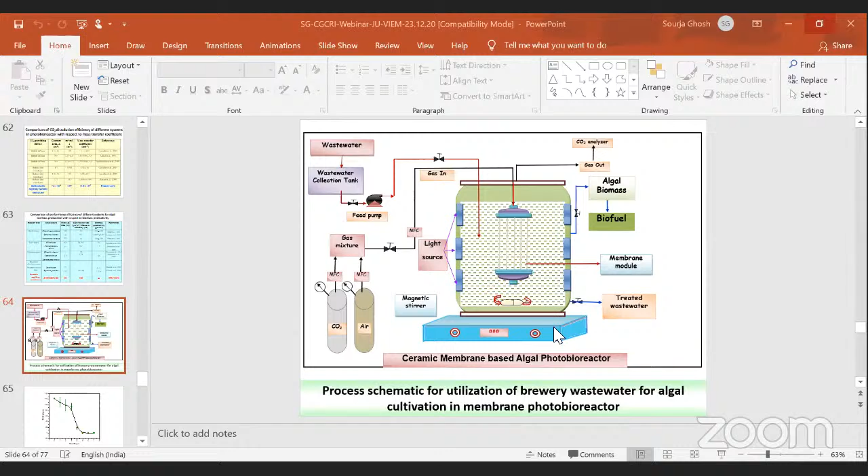We use a simulated flue gas mixture in the system, provided under stirring conditions. CO2 concentration is analyzed periodically, and algal biomass is collected from the port and analyzed for biofuel value. The treated water is collected and recycled either for biomass production or other reuse applications.

This is the total organic carbon removal profile in brewery industrial effluent during the photobioreactor process. Over 120 mg per liter initially, it reduced to close to zero, achieving complete TOC removal.

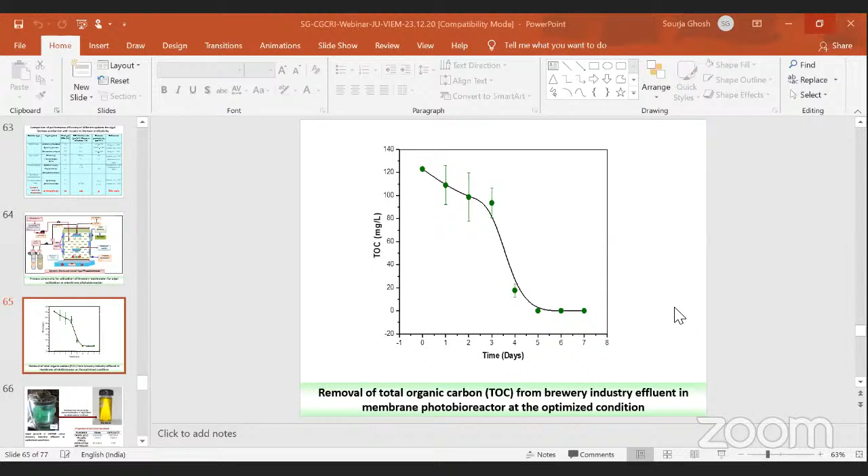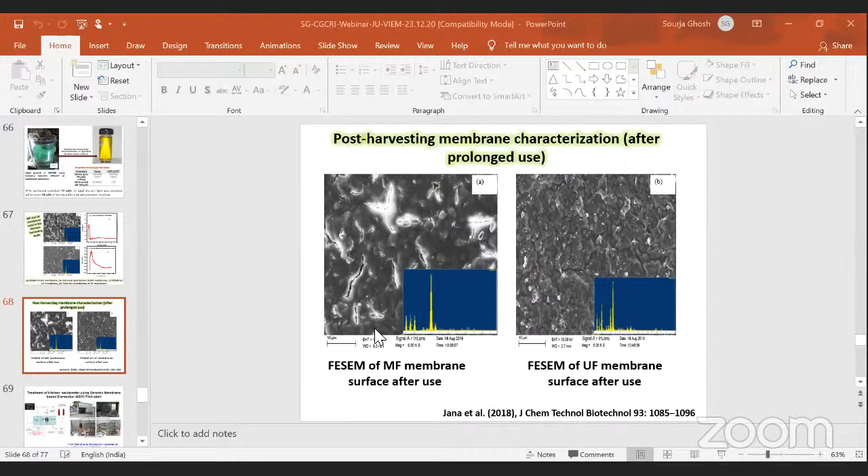The advantage of these membranes is that they can be completely cleaned and reused again, so the flux could be completely regenerated after the biomass harvesting operation.

This is the treatment of kitchen wastewater using ceramic membrane-based bioreactor technology, installed in our institute itself, wherein canteen wastewater is treated in the membrane-based bioreactor plant, and the treated water is used for toilet flushing applications in the institute.

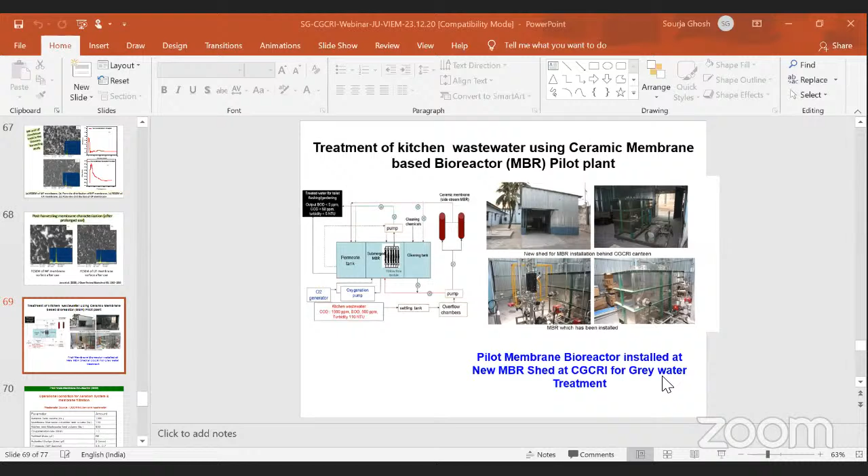This is the pilot scale membrane bioreactor process. Some data are shown: the process can completely remove pathogens and microorganisms so that the water is suitable for reuse purposes, and COD, BOD and other parameters are considerably reduced in the MBR process.

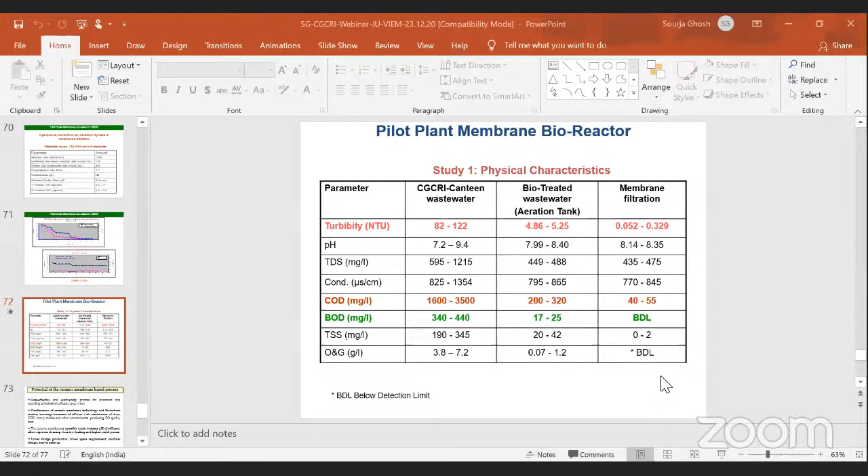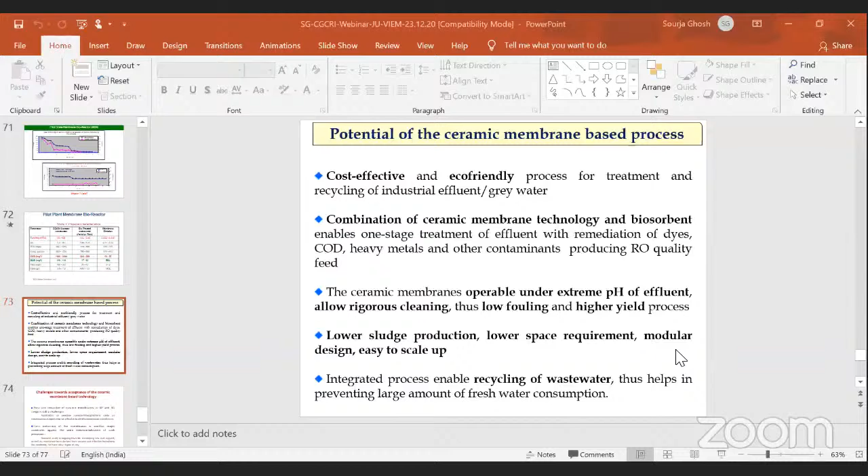There is low sludge production, low space requirement. Membranes are modular in design and easy to scale up. Integrated processes enable recycling of wastewater, which is a step towards zero discharge of wastewater.

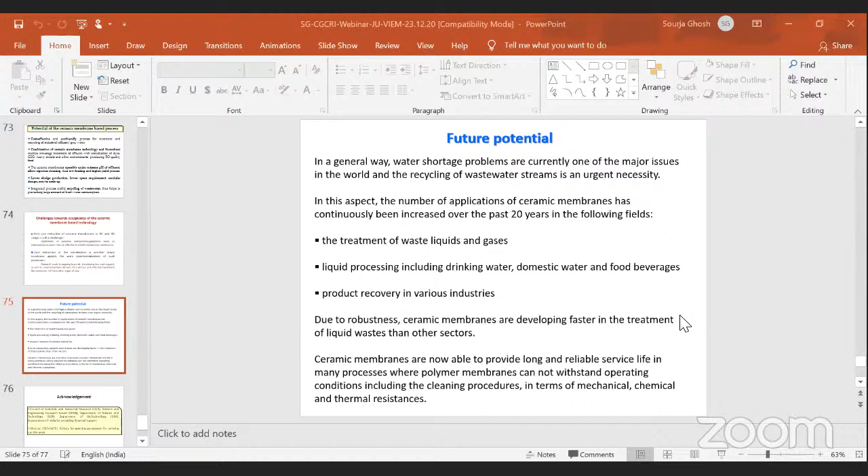The future potential of such processes includes treatment of waste liquids and gases, liquid processing including drinking water, domestic water, food and beverages, and product recovery in various industries. Due to robustness, ceramic membranes are developing faster in the treatment of liquid wastes than other sectors. Ceramic membranes are now able to provide long and reliable service life in many processes where polymer membranes cannot withstand operating conditions, including cleaning procedures, in terms of mechanical, chemical, and thermal resistances.

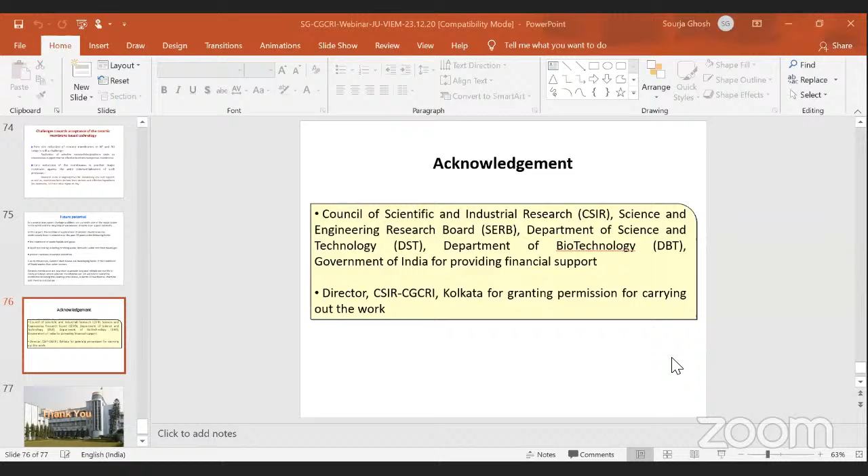Thank you, for such wonderful, innovative ideas. In fact, sometimes some of our students were also involved in your work in Mantala and other premises, but I did not know such beautiful things had come out of that work. This is really wonderful, and the ceramic membrane module is very potential for this particular area, which is also very thought-provoking.